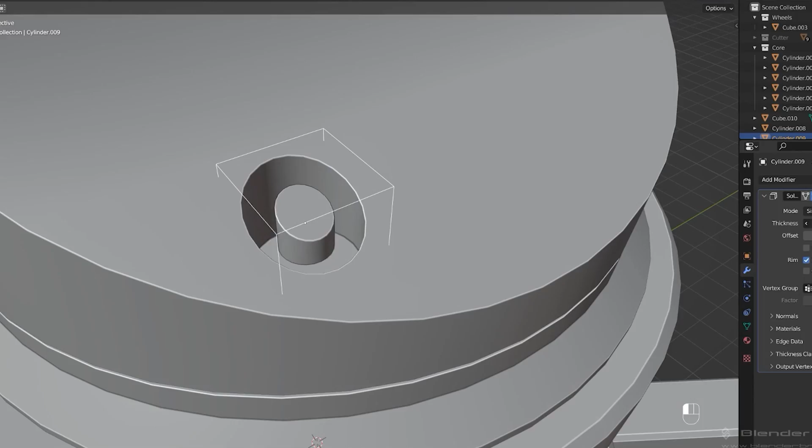Now, I'm actually really excited for this video because I'm going to show you a lot of cool tricks, including a trick that you usually can't accomplish in Blender. So stick around for that. There's going to be a lot of useful information in here.

So we're going to start with the cylinder. I'm going to make the vertex count 64, and I'm just going to right click to shade auto smooth. And by the way, I'm in an older version of Blender because honestly, I don't know why, but there's really not too much difference from 4.0 and 3.6. So if you're wondering why I'm in 3.6, I don't know. It's a good question. I think I just opened the wrong blend file, but literally all the tools are the same, so whatever.

So what we're going to do here is we're going to just go into wireframe and box select this half right here. Then we're going to go into top view and extrude this. Somewhere around here should be fine. And now we're going to have an object that kind of looks like this, which is great. Now, to be fair, I probably could have just taken a cube and beveled the edges and got the same result, but who cares? This is fine.

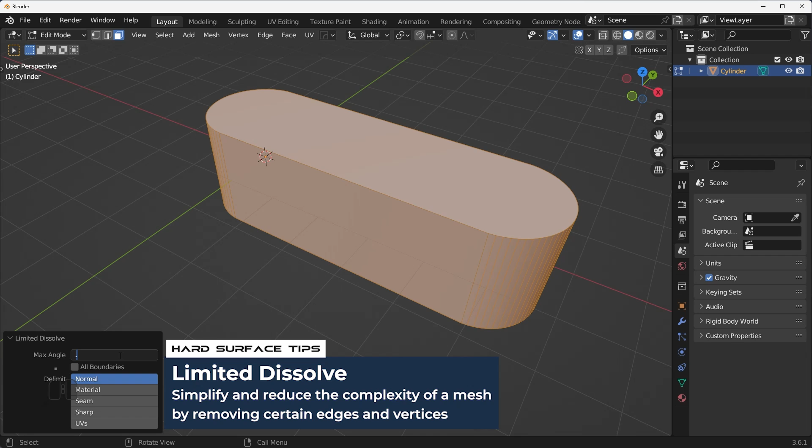So I want to get rid of all this nasty geometry on the top. Let's just select everything, press X, limited dissolve, and we're going to set this to something really low, like 0.1, so that way it's only dissolving the flat areas here. There we go. So basically I just want to have a shape like this.

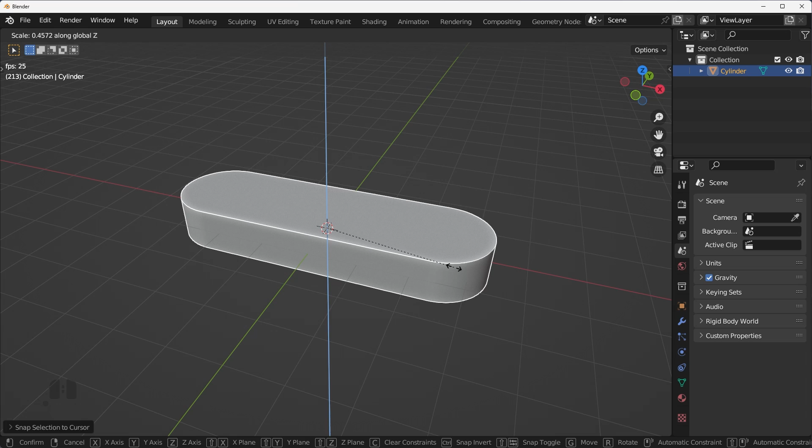Let me reset the origin to the geometry and then Shift S, selection to cursor. Again, I could have just taken a cube, scaled it, and then beveled the edges. I don't know, did it a different way for some reason. So we're going to scale this down a bit, maybe to around here should be okay. And then I'm going to press Control A to apply the scale.

And now what I want to do is add in another cylinder. So Shift A, cylinder, right click to shade that smooth. And what I want to do is I want to align it on this side here perfectly. So I could eyeball it, but why guess when you can be accurate?

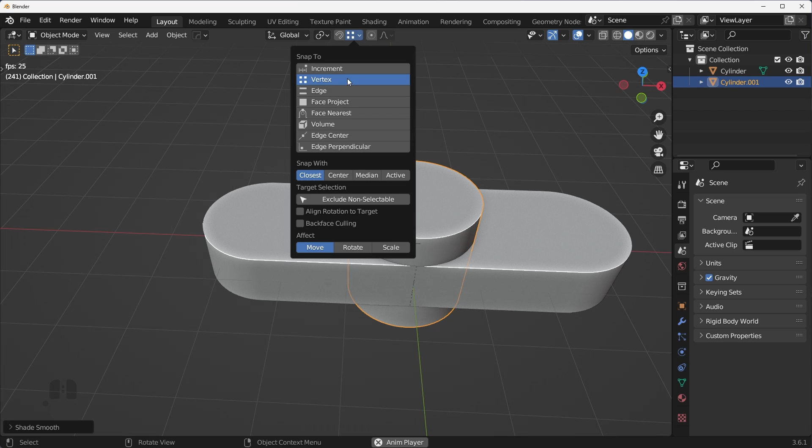So what we're going to do is go up here to vertex snap. I'm going to press G, X, and then hold Control and snap it here to one of these vertices at the end. There we go. And now we're going to have something like this, which is great. Now what I want to do is take this bottom face and snap it up here as well. So now we basically have something kind of like this.

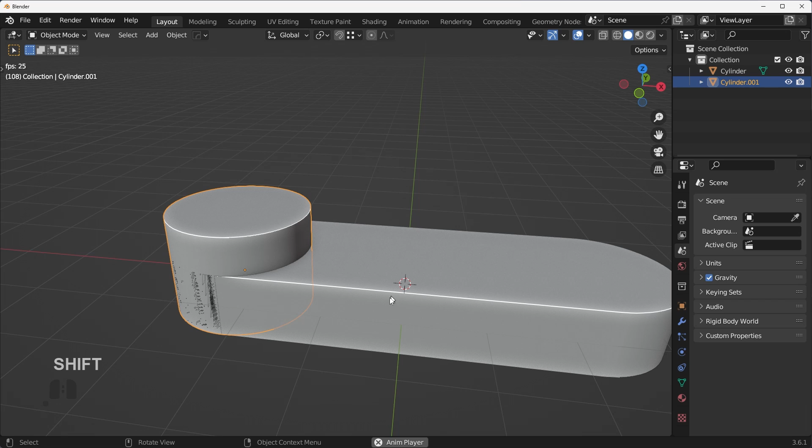Great. So now what I want to do is I want to fuse this cylinder to this object here. So the easiest way to do that is with a union boolean. So all we do is we shift click on both of these. I'm going to press Control plus on the numpad, or with hard ops, you just press Q, booleans, and then union. And it's going to break, and that's because we have overlapping geometry.

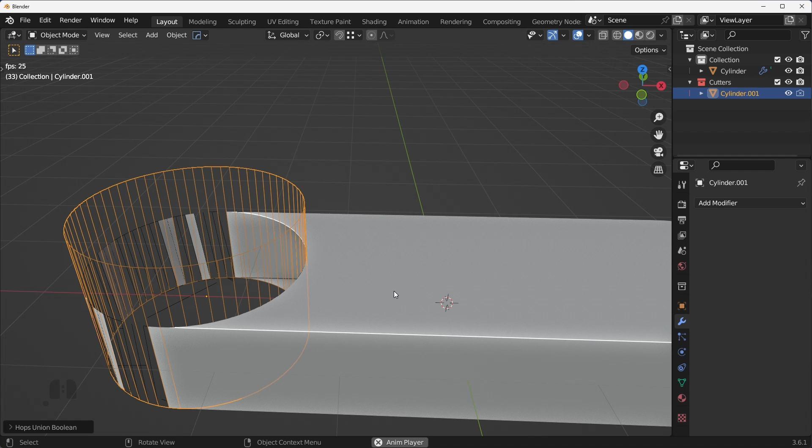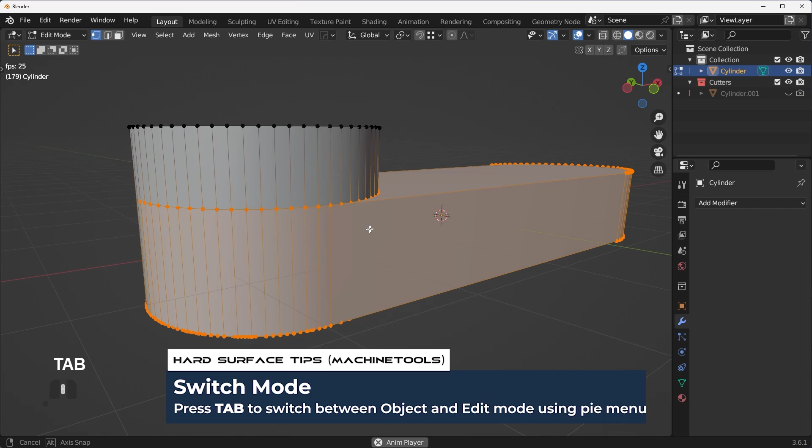Very easy fix. We go here to the boolean, change this to exact. Shout out Howard for making this all those years ago, amazing new option here. So make sure you turn on exact. Then what we're going to do is we're going to have to clean up the geometry here. So let me hide this cutter. And basically, if I go into edit mode here, you're going to see we have a little bit of a mess.

The first thing you need to do is, if you have machine tools installed, which you should, go into the machine tools settings and make sure you have all these different options turned on: clean up, smart face, smart vert, all that. Turn all of this on, and then you're going to press the 3 key. That's going to clean up any redundant geometry.

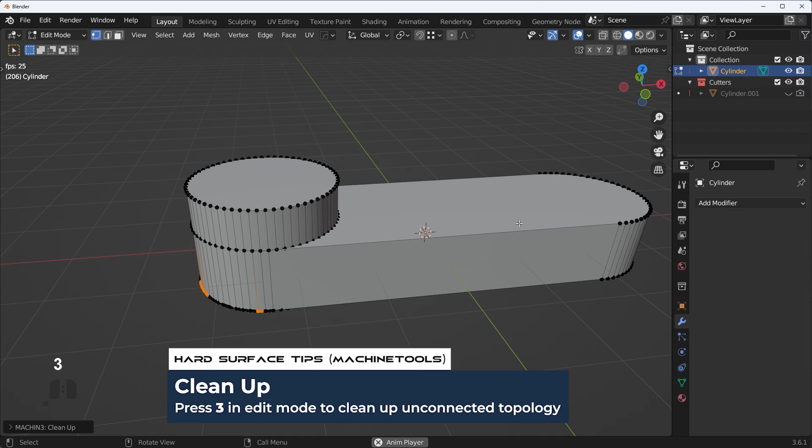Now what we need to do is clean up this random garbage down here, and we do that by pressing 3 and then limited dissolve once again. Sometimes things still break, and you'll see we have a little bit of a mess here. So what we're going to do is try to clean everything again, and then try to limited dissolve.

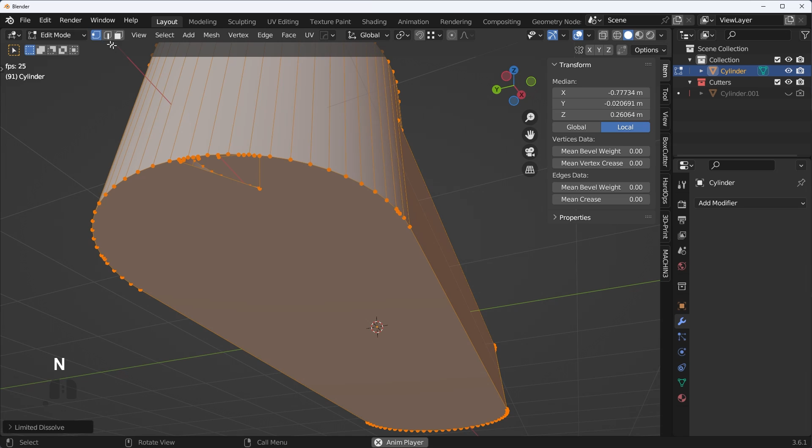If that still doesn't work, you can also use a cool little tool called the 3D print toolbox. You just turn it on—it comes with Blender. Basically you can go in here and click on check all, and you'll see we have all these non-manifold edges. I could literally press F to fill that, and then try to limited dissolve again, or even just click on make manifold, and that's going to actually fix some of the issues. You can see those redundant vertices went away.

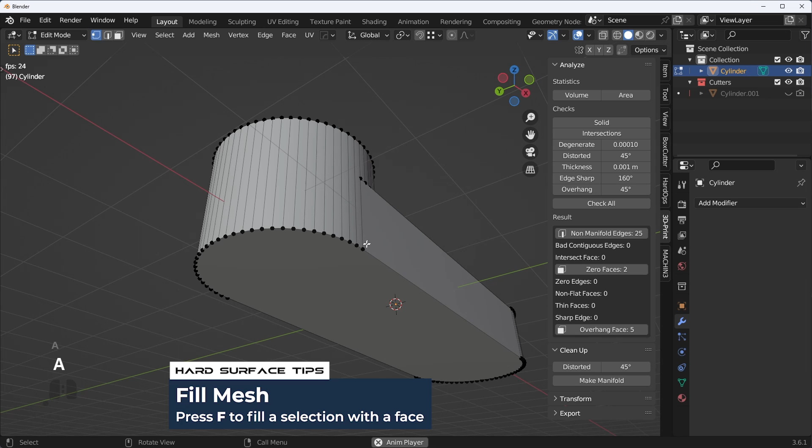If it's still a little bit messy, you can always get in here and patch this up manually. Very easy—what I'm going to do is just delete this bottom face here, and then quickly dissolve out these random vertices here. Then I can just hold Alt and fill that in. That's what happens sometimes with the exact boolean, you just get messes kind of like that. Anyways, that should be fine, it's all cleaned up.

So now we have a piece like this—this is fused together, everything's clean. Now what I want to do is actually have a bevel between these two intersecting points, right here on this edge. But in polygon-based modeling software, this is not going to work at all. This is where you would actually need CAD.

Let me show you a different solution, but if I were to go in here and try to bevel this, it's going to kind of break over here. This is the downside of polygon-based modeling software—there's not too much you can do to sort this. So to get the bevel here that we want, this is where we would actually need to use subdivision surface. This is a prime example of where booleans and bevels just aren't going to work the way we intended.

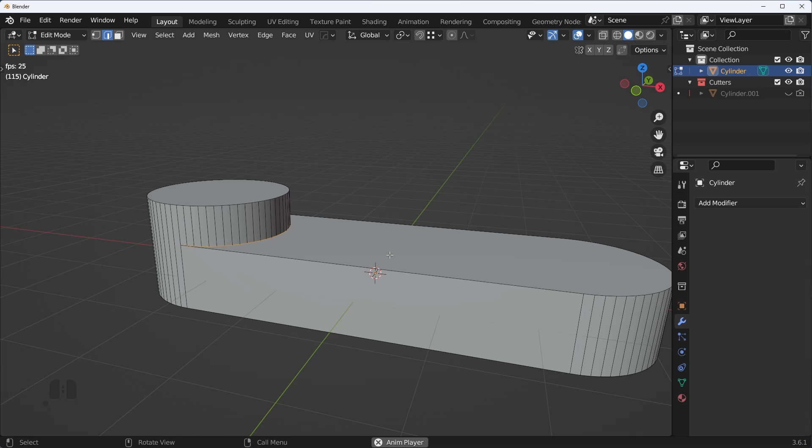So what we can actually do to solve this is use sub D, and I'm going to show you some really cool tricks here to achieve a clean bevel in this area. Now the first thing I want to mention is if we're running sub D, it's going to increase the resolution, meaning we should be starting with a lower poly version. This one's a little bit higher poly—remember we had a 64 vertex cylinder, but it's no problem at all. What I'm going to do is either undo everything and add in a lower resolution cylinder, or check this out.

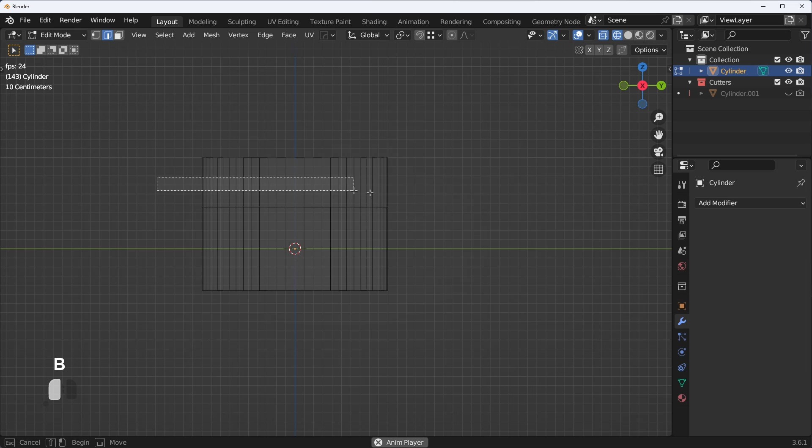I can go into wireframe, go into edge mode, box select this, and then go to select, checker deselect, and then Control X to make that lower resolution. I'm going to do that here as well—I'll use the circle tool to select them, checker deselect, and make sure you're not holding the edge, but the one before it. Otherwise it's going to hurt the bevel. This last edge is what's holding the curvature on the bevel.

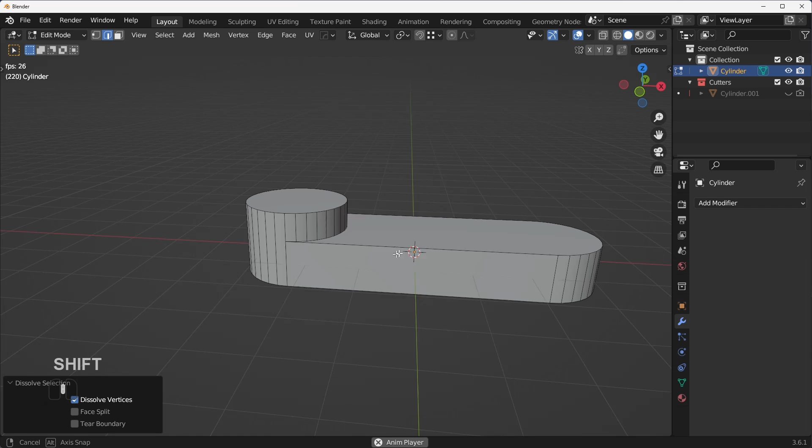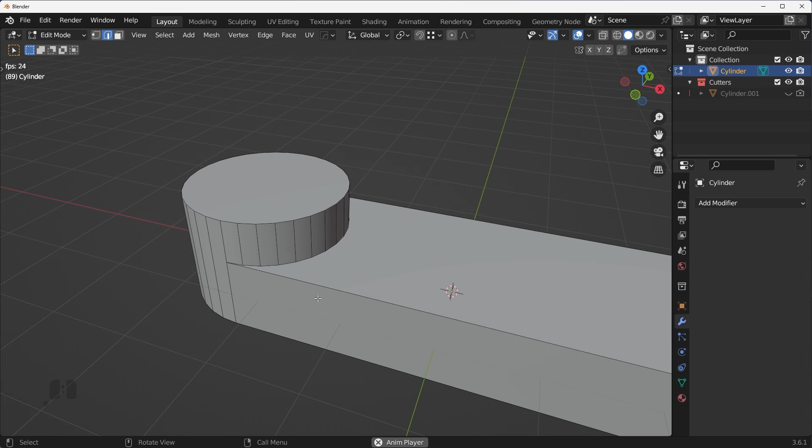So we're just going to turn this to offset 1 and then Control X to dissolve that. Now we have a much lower resolution object here, which is great. Now if I try to just run a sub D, it's going to turn into some sort of pumpkin or something crazy, and that's not what we want. So what we're going to do is have creases on the edges we want to hold, and a regular sub D on the areas we want rounded. It's probably confusing, so real quick I'm going to press Control tilde, go to the sharpening menu here in HardOps, and make sure you have this crease option turned on.

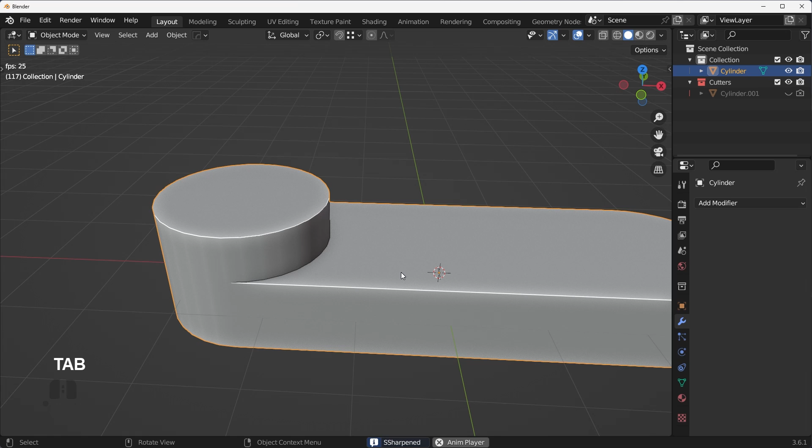If I press the Q key and click on sharpen, all the hard edges here are going to be marked with a crease. So now if I run a sub D, it's actually going to hold everything together except for this area here.

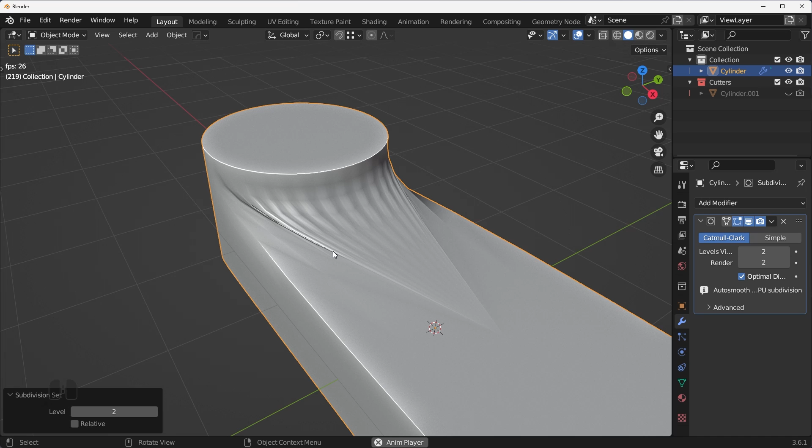What I want to do is remove the crease on this portion. So we select it and press Q to unmark it. Now if I run a sub D, we're getting something close to what we want, but it still looks strange because we have one massive n-gon right here. Sub D is not going to look very good on an n-gon, you can't subdivide n-gons very well.

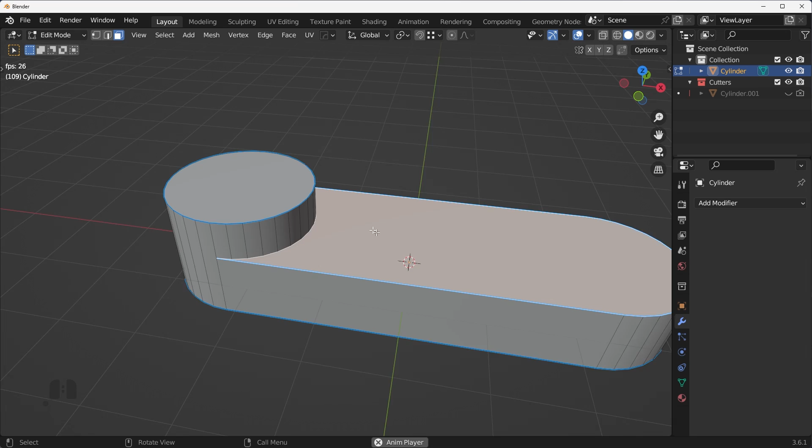So basically what we need to do is isolate the area where we want the bevel and retopologize that specific area only. It's probably confusing, but let me show you. If I were lazy, I'd just use something like Quad Remesher and call it a day, but I'm going to show you a really cool solution.

What we're going to do is use Box Cutter. We're going to cut somewhere around here and then press the K key to run a knife cut. Now we're going to have something like this, just to cut straight through the object. The first thing I want to do is select this edge, right click, subdivide, and then connect these two vertices up with the J key.

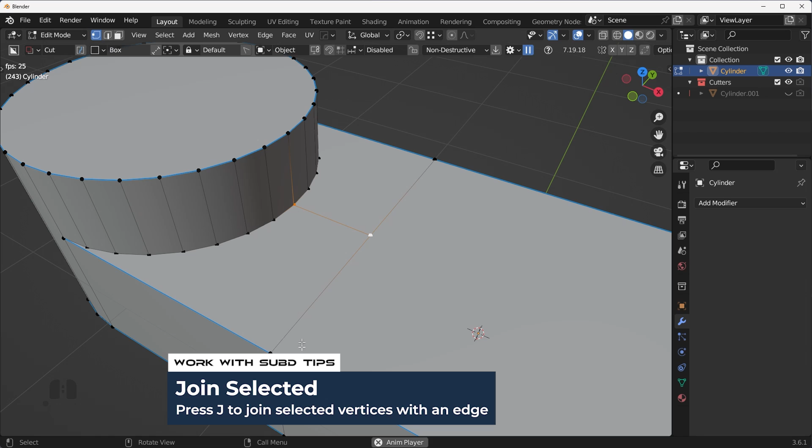What we're going to do here is retopologize this area only. Next I'm going to press J to join these two. Then I just need two additional vertices, so I'll press Control R, scroll up, and click. Then I'm just going to join these together with the J key, just like that.

We're already getting a step closer. Now what I want to do is the same thing over here. We have 1, 2, 3, 4 vertices, so 1, 2, 3, 4 edges. Again that's Control R, we're going to load those in and join them up. Don't worry about how it looks right now, we'll fix it in a sec. We just want to get this area retopologized first.

Now I'm going to keep this lined up a little bit better. I'm going to select this edge and press G twice, and we're just going to slide that over and keep it consistent more or less. Maybe around here—doesn't have to be perfect, just try to be good enough.

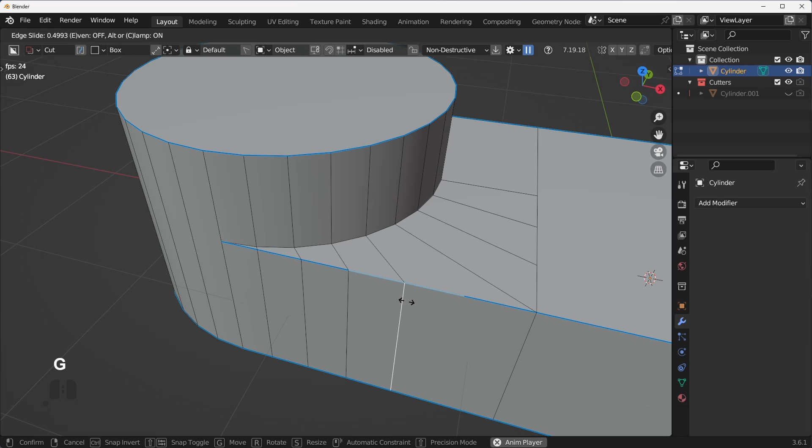What I'm going to do is use Symmetrize with Mesh Machine to symmetrize to the other side. You could also just use a hard ops mirror—press Alt X and we can apply that mirror. Now we have it on this side as well, which is great.

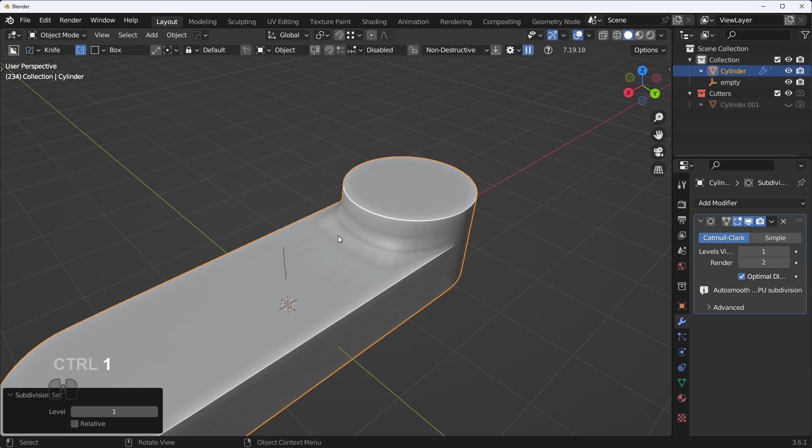So now what we can do is run a sub D, and you're going to see this is a lot better. You can see the higher I go on the sub D, the smoother it gets, the more natural of a bevel we have.

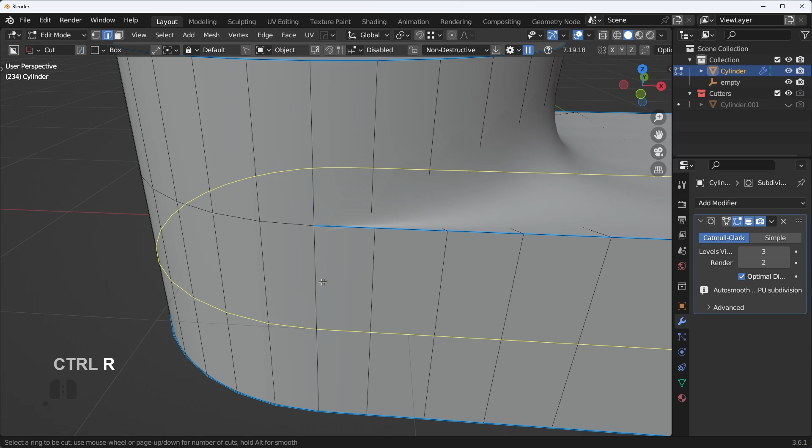Now we have a little bit of pinching over here. I'm not too concerned about it, but we can fix it easily by pressing Control R and joining this area together here. There we go, so now most of that pinching will have gone away. You can always add in another one if you want to even it out a bit more. You get the idea—okay, so now we have that bevel that we were going for.

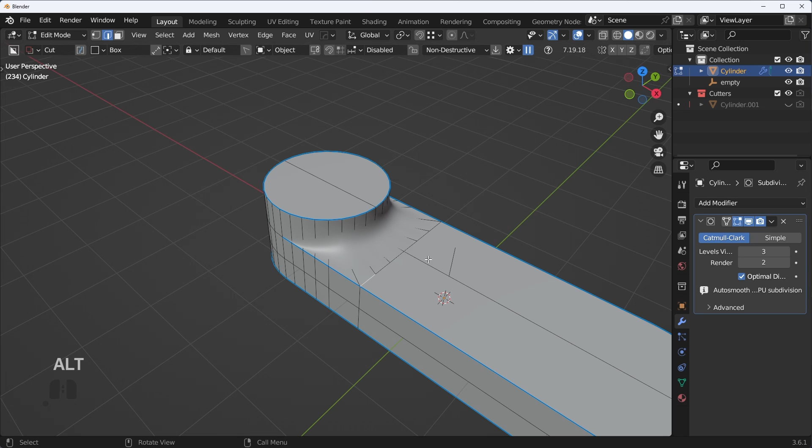Some people would recommend merging these really close areas together for better effect, but this is about as good as we're going to get here. So now, as you can see, I've basically isolated the area I retopologized just to get that clean bevel formation. If I wanted to, I could always go in here and slide this around—if I want to tighten up that bevel, I can do that.

Just depends on what type of effect you want on here. I think something like this will look pretty good. Again, you can play with that and see what you like, what you don't like. You get the idea.

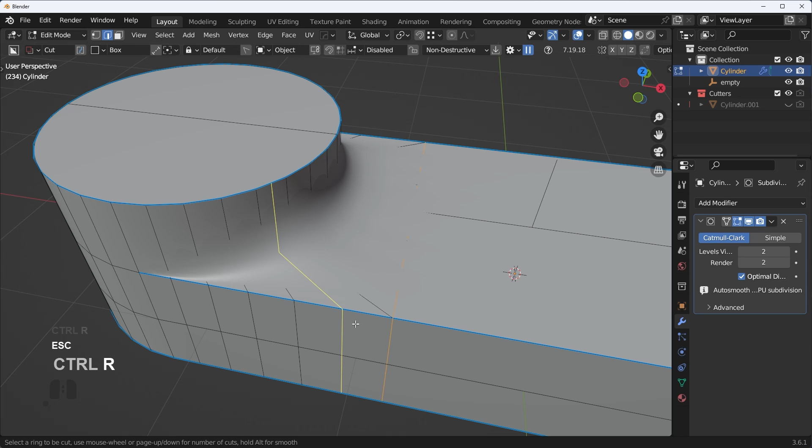Anyways, it looks pretty good to me. Now what I would recommend doing is pressing Alt V and then go into wireframe mode. Let's turn off the optimal display in the sub D.

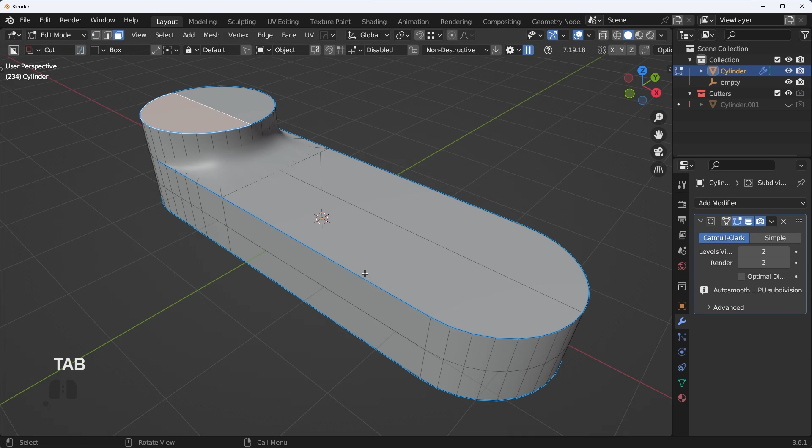We can just kind of see, the rest of this area is a mess because we're subdividing n-gons in the other areas of this mesh. As you can see here, we have a big n-gon over here. You get the idea. Thing is, I don't care because I'm just going to remove all that junk anyways.

So I think we can use a level 2 subdivision for this one. You don't want to go too low or it's going to look blocky. Too high might be a little bit too high resolution, which is fine. How about we go with a 2? I think 2 is fine.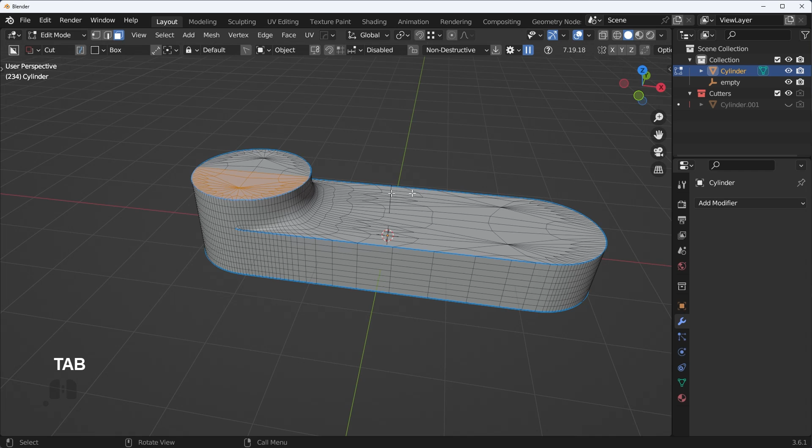What we're going to do is apply that sub D. And we're just going to clean this up by, again, selecting everything, X, and then limited dissolve. There we go. So now it's only going to dissolve the junk on the flat faces and the areas that kind of have curvature here. In this particular area, you can see it's kind of holding all of that.

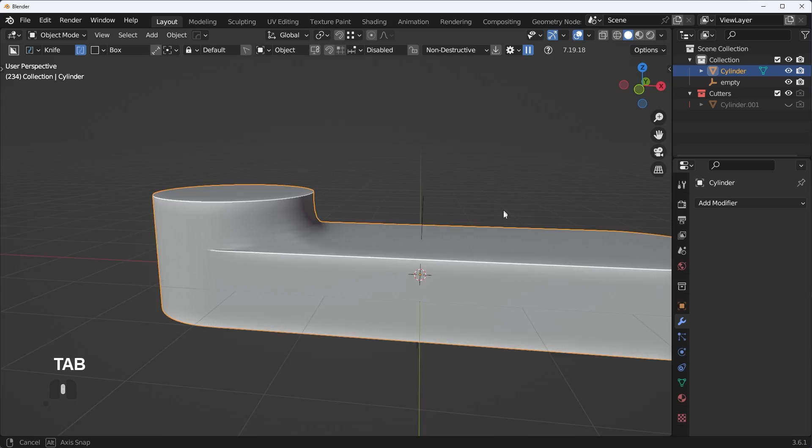You could increase this angle a bit if you wanted to push it a bit more forward. And honestly, that should be fine. I'm not too worried about it. But don't start dissolving this stuff, because if I go into side view, this is actually holding the curvature there, so you don't want to go too far. Anyways, now we have a nice bevel without having to use a CAD software, as you can see.

And I actually ended up limiting dissolve a little bit too much over here. So again, that's why I'd really keep this as low as possible, if you can get away with it. Something around there would be fine. Let's just do 0.1. Can even slowly increase this. Maybe like right around here could be fine.

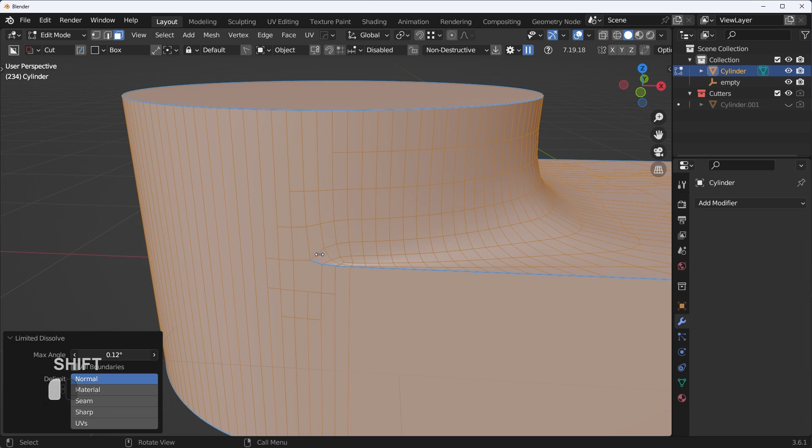Awesome. And then if you just have extra garbage here, feel free to just dissolve that out. We'll just grab these, and there we go. And you might have some extra stuff over here as well. This can be dissolved out as well. It doesn't matter too much. But what I can tell you for sure is you don't want to go any further than this. So let's just leave it there. And there we go. Now we have a nice bevel.

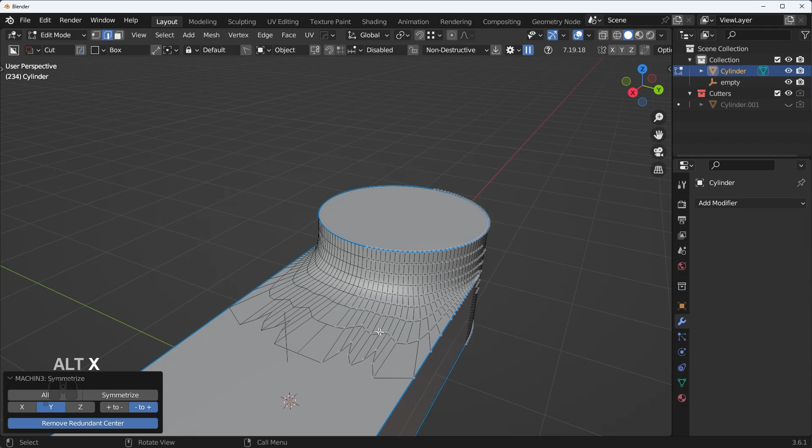Cool. So I'm not really trying to get super clean topology in this situation. All I'm trying to do is just get a nice bevel here.

Alright, now what I'd like to do is let's go in here. Actually, let's press Alt X and then mirror this thing on the Y axis. Yeah, it looks pretty cool. And then I'm just going to apply that mirror modifier, just like that.

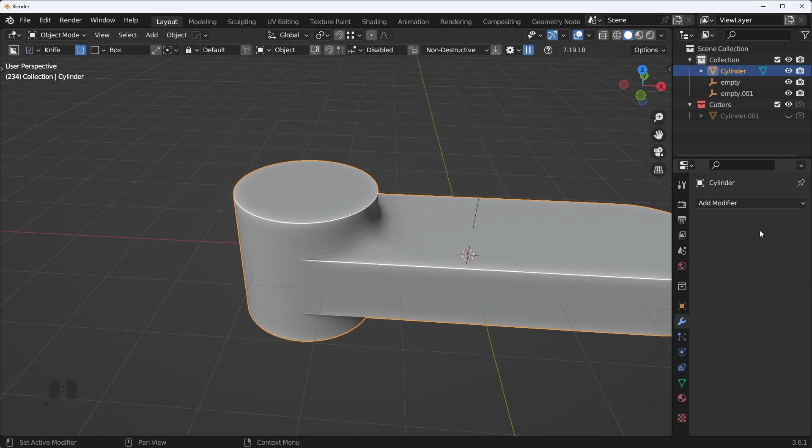And what I'd like to do at this point is let's take this face right here, Q, booleans, and then selection to boolean. We're going to move this in to about here. And then we're just going to cut all the way through, just like that.

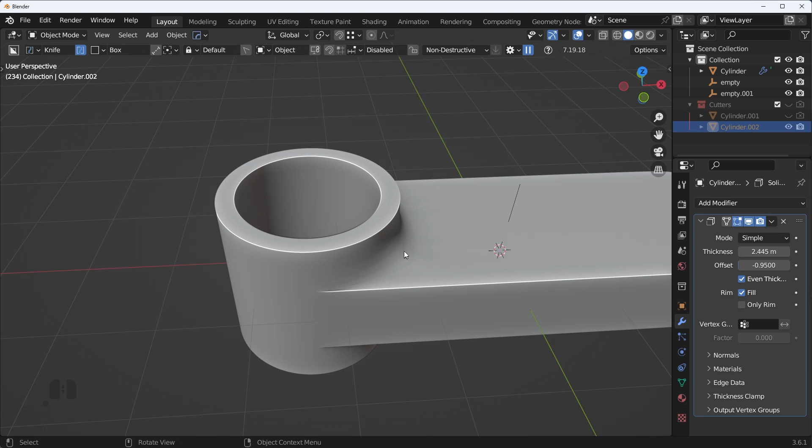Awesome. And then sometimes the cavity feature turns off, I think that's a bug. We'll just turn that back on. There we go. And then what I'd like to do is, how about we just apply that boolean and then Control R to the inside, Control B. Then let's press E to extrude, right click to cancel, and then Alt S to scale along the normals, and then scale that a bit on the Z, and just make some sort of cool detail here on the inside.

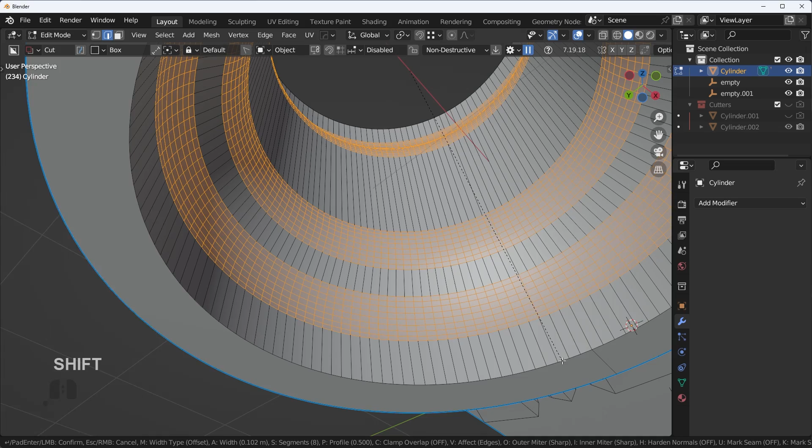So just bevel this area. There we go, that looks pretty neat. And I want to make this area here a little bit higher, so let me just take these faces and move that up a little bit.

Just add a mirror. It's a little bit too much, maybe to about here. And then we can just mirror that to the bottom. There we go. So now I want to focus on this area a little bit over here.

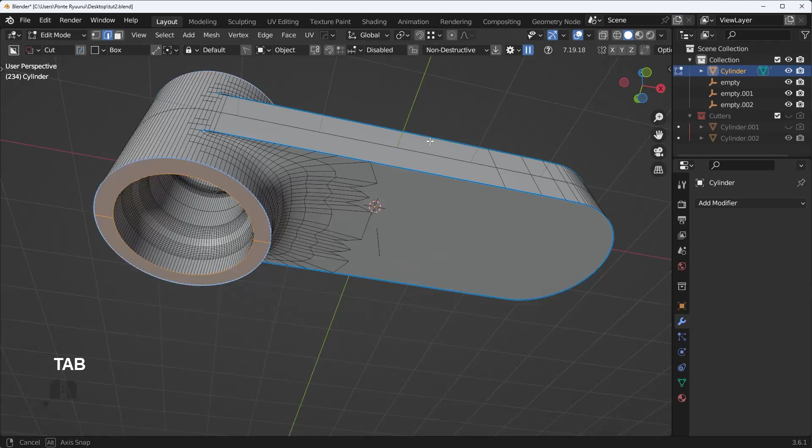So what I think I'm going to do is, how do I want to do this? Let's go to the cutters menu and see if we have any cutters we can use. I don't think we did. Yeah, we don't. Let's turn that off. What I'm going to do instead is I'm going to steal this area here.

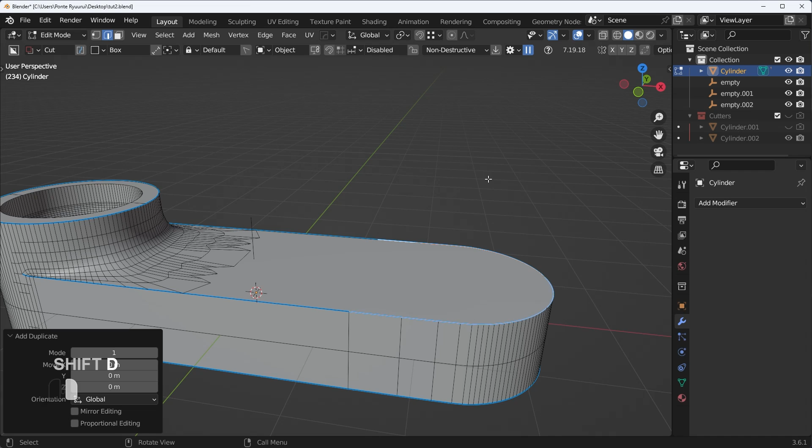So Control click, Shift D, right click, and then P to separate that by selection. I just want to take this area here. I'm going to move that up a little bit. And what I'm going to actually do is mirror this over itself.

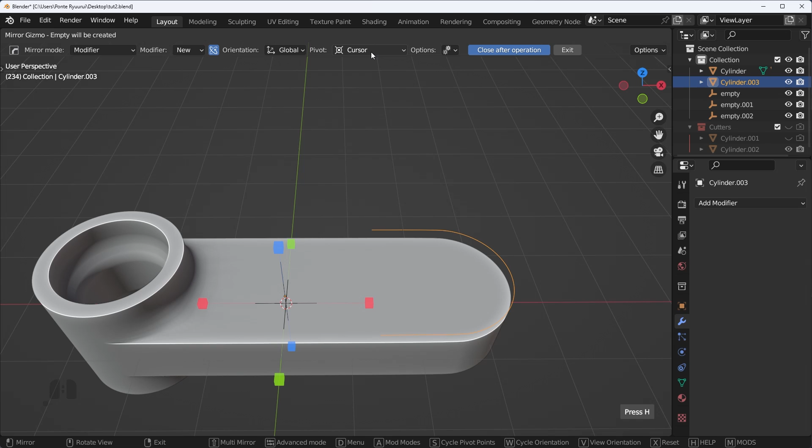Now, if I press Alt X, the mirror point is going to be over here. So let me press Alt X, make sure this advanced feature is turned off. And actually, no, I want to turn this on, but I want to mirror over the cursor, but the cursor is here right now.

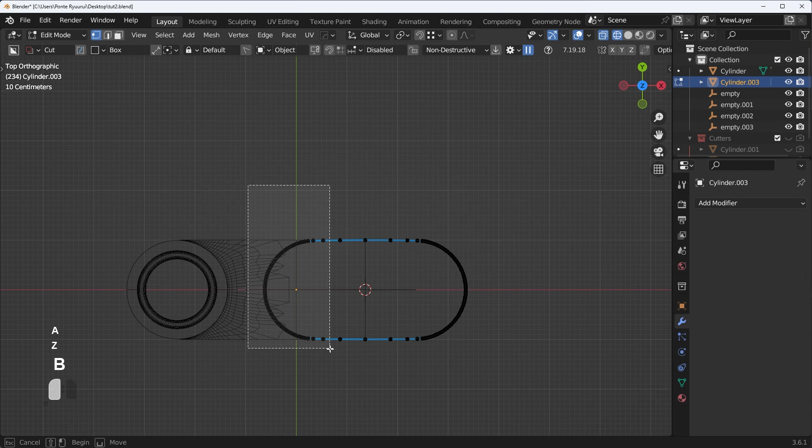So what I'm going to do is take these two vertices, Shift S, and then cursor to selected. Now it'll be right there. So now if I press Alt X and try to mirror it, I kind of have this cool looking effect, which is great. I can just apply that mirror, and then get in here and move this to my liking, maybe to about here.

Let's just get in here and get rid of this junk, which we don't need. And then I'm going to press A and then F to fill it, and then I to inset, maybe to about here. And then if I invert the selection with Control I, I can delete out all these vertices here, which is great. Actually, no, we'll just leave those alone. I think that's holding the curvature.

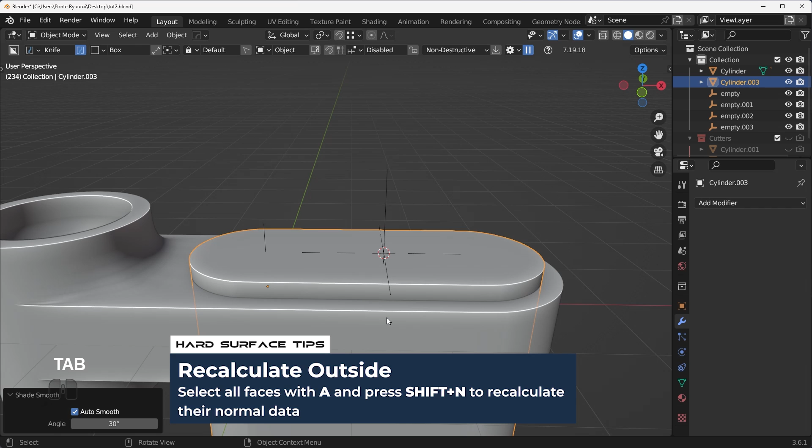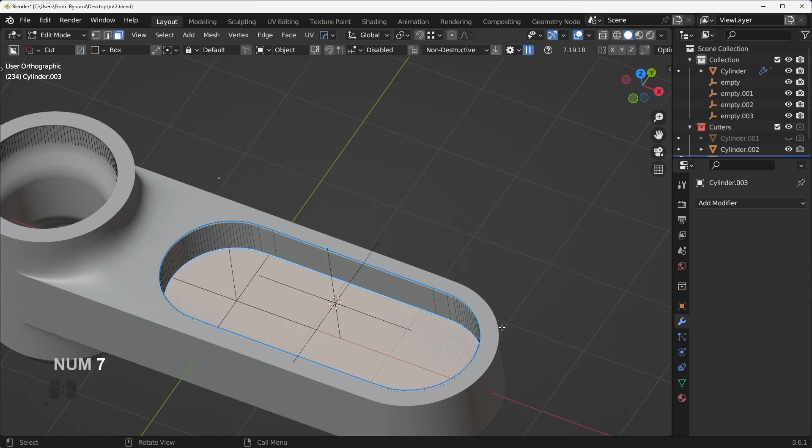So right around here, can run a difference boolean. Right around here should be fine. And then I'm going to take this top face, move this down to about there. And then I'm going to take this bottom face and just scale that in a little bit, until it's roughly even on all sides, kind of like that.

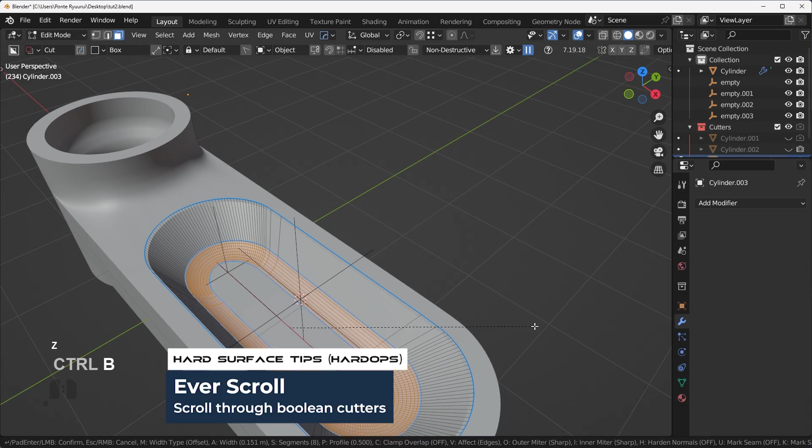And then I can just shift click on sharpen to adjust that auto smooth. There we go. Now I would like to have a nice bevel here in the bottom. So let me press Q, scroll, get in here, and just kind of bevel that area a little bit. That looks pretty neat, and then I'll just apply that. Actually, yeah, let's apply it. There we go. And then just Control Shift click on sharpen to recalculate everything. That looks pretty good.

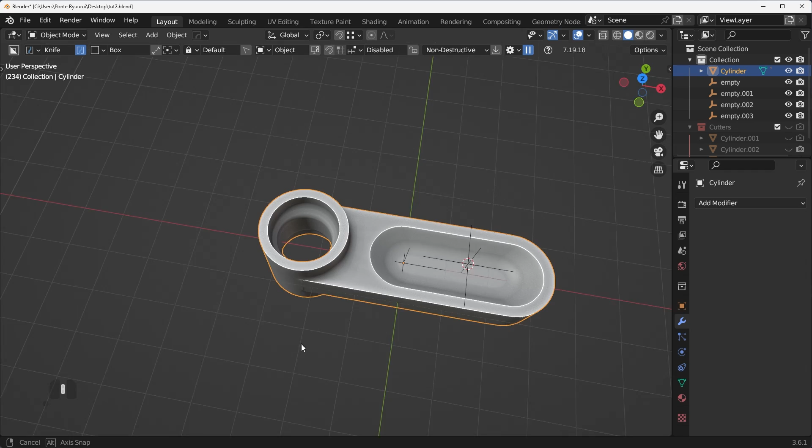Definitely looks nice. So now we kind of have a symmetry on the Z, but this area is not on the bottom, so we're kind of breaking the symmetry in a way. It looks cool. And then what I want to do is maybe just add in a cube and make another cut down here, just do it the lazy way.

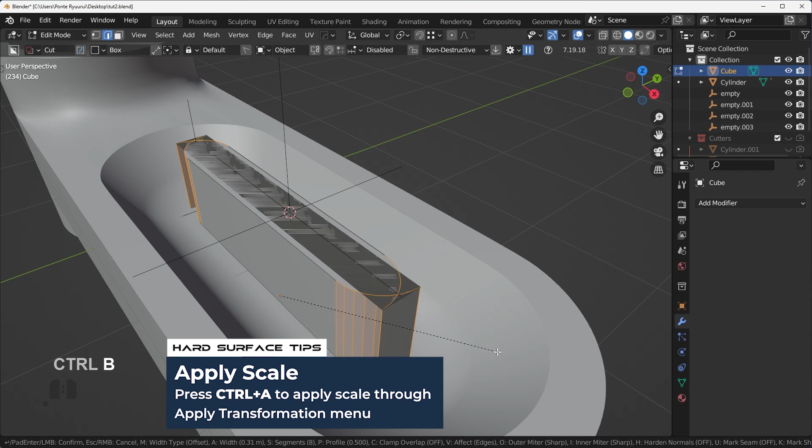And then just scale this all the way through, apply the scale, and then I can get in here and bevel this area, clean that up. And let's shade auto smooth and then run a difference boolean down here. There we go, looks pretty good.

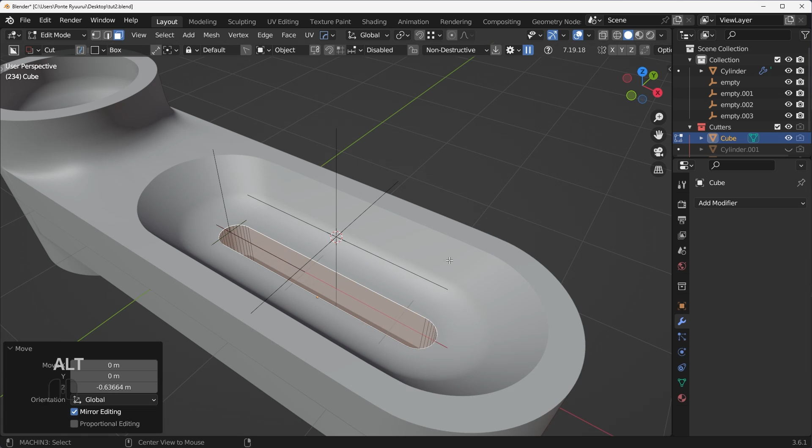Then I'll show you a cool trick. I can actually take this cutter and move this face down right to the top there. And if I press Alt N to flip and then bevel, it'll bevel in the opposite direction, which is really cool. We can just adjust the sharpen there.

I can even hide these little empties, don't know why they're here. I think it was from the mirror. Can't select it, but you get the idea. We can actually go in here and turn off the extras so we don't see them. Awesome, now we have this cool looking shape.

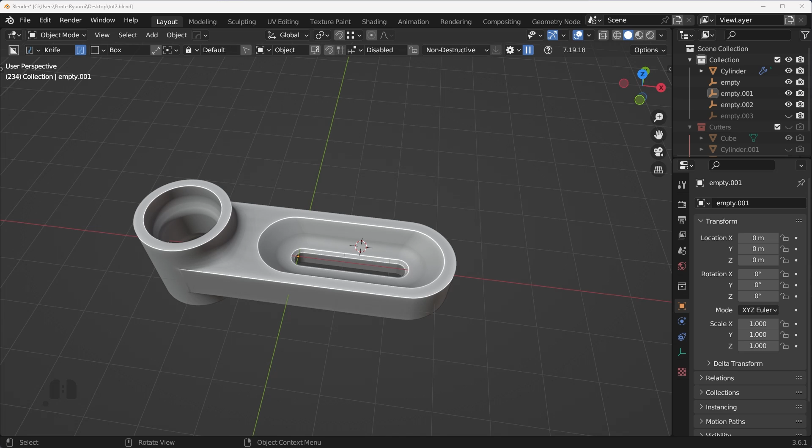So let's apply the Boolean, and I'm going to go into top view and maybe just make this a little bit longer, I think it'll look cooler. Yeah, it looks pretty neat.

And then what I want to do is take this upper portion and add a chamfer to this. Now, if I press Control B and add a chamfer, it's going to stop us. That's because the clamp is about to overlap right here. So what we can do is press C to ignore that.

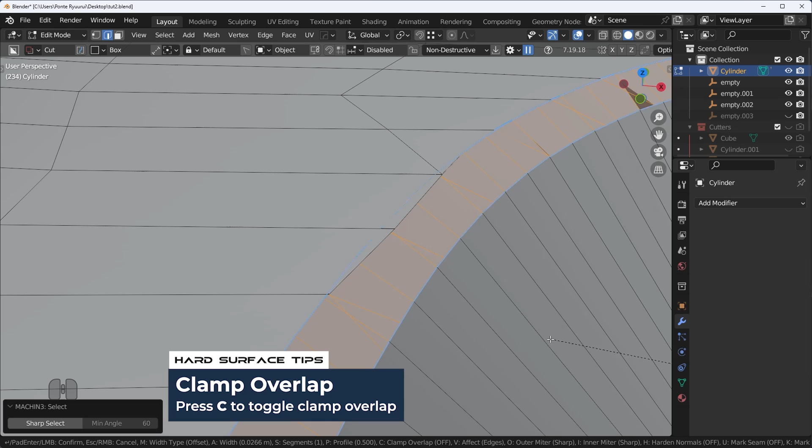The issue with this is if I add the bevel or the chamfer this way, I'm going to have this mess. So I'm going to have to really get in here and just slide these areas away, and I just don't know what to select.

Much easier way to do this is to actually press Q, Control click on mark. That'll add in a non-destructive bevel, one that I can actually turn off and on. But the upside of this is I don't have access to that bevel geometry, it's just like it was before, right?

So I can actually select the areas and slide this outside of the bevel, outside of the way. So that surrounding geometry causing these weird artifacts, all I have to do is literally just get in here and clean it up. I can just kind of merge these together, don't have to get too fancy with it. I just want to get rid of those artifacts.

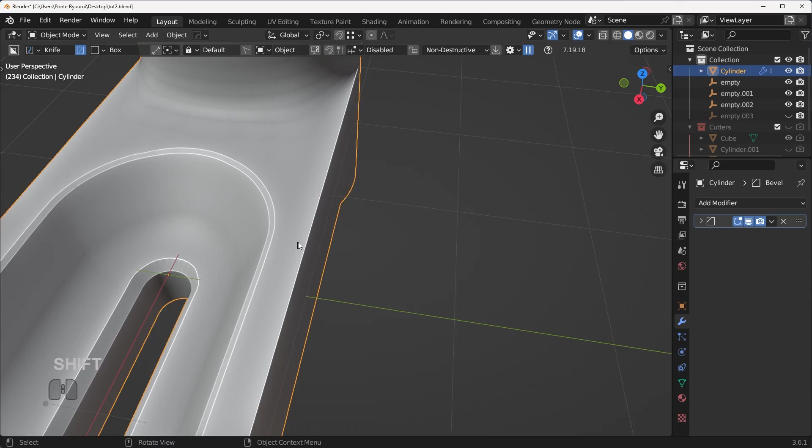There we go. You can also just adjust that bevel a little bit. And if you're still getting artifacts, you can always just dissolve out some of these areas. You'll be fine. Cool. And then let's just mirror to the other side.

That looks great. And then at this point, I think it's safe to just apply that bevel. There we go. And then I can also apply the mirror. And now we have this pretty clean looking piece.

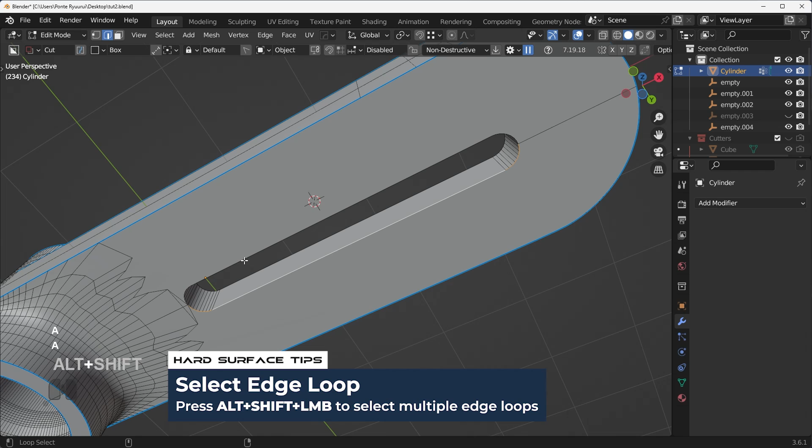I'm not going to really adjust the bottom too much, but maybe here on the bottom, I could do the same thing. I could Alt-Shift click, just do a small chamfer down here, and just kind of do something like that.

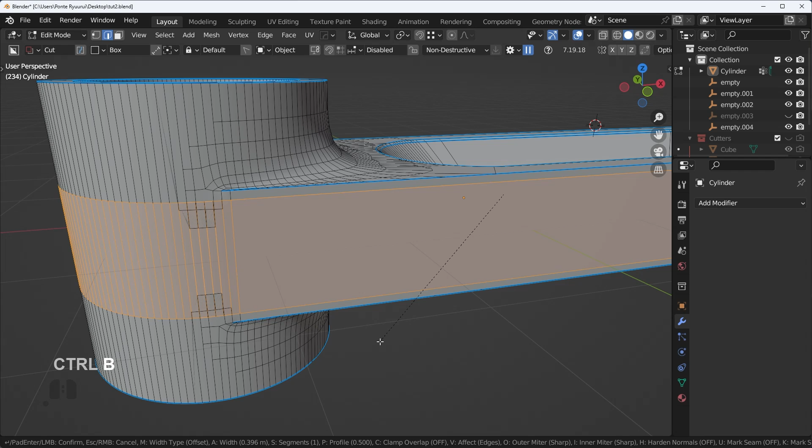Looks pretty good. So I think that does it for the modeling portion, and you could stop here if you wanted to. We do have a little bit of strange shading over here, not a problem. I can always get in and just kind of bevel this area to isolate it, just dissolve out this junk. There we go, looks good.

Okay, now what I want to do is I want to go into rendering mode. How about we render this thing? Why not? I don't know what I just did here. Oh, it's because I ran a symmetry.

Whoops. Yeah, you got to be careful. If I symmetrize to the bottom, we're going to have the same thing on the bottom and top, which maybe you want that. I'm just going to leave it alone and just dissolve this out manually. There we go.

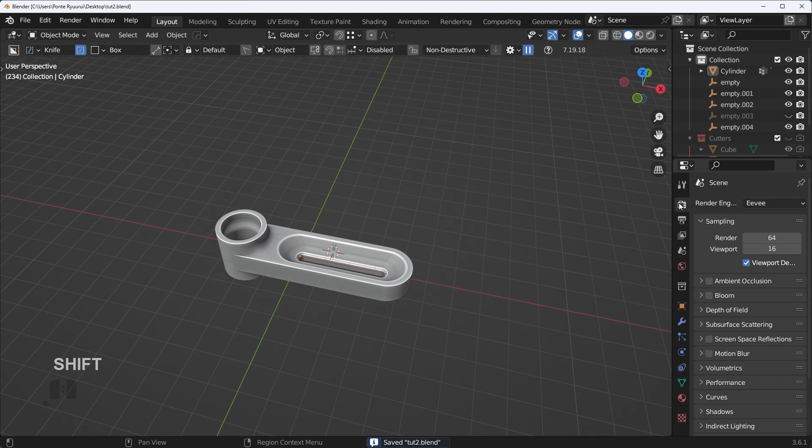Okay, so let's go in here. Let's go into cycles and make sure we're rendering on our GPU. And I'm going to be using the Abandoned Slipway HDRI from polyhaven.com. It is a free download, so get it. So I'll just go here to environment texture and then just open up that HDRI.

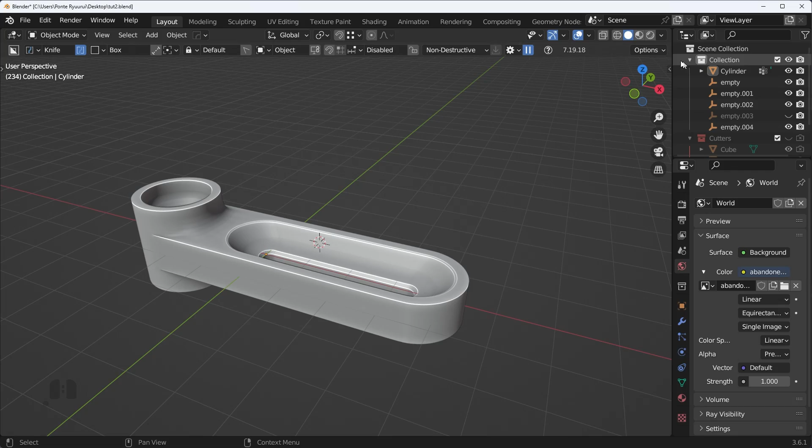So I have a ton. I'm just going to load in this one. There we go. And then if we go into rendering mode, we're going to see we have very flat lighting, which is great. Now I'm just going to turn that off.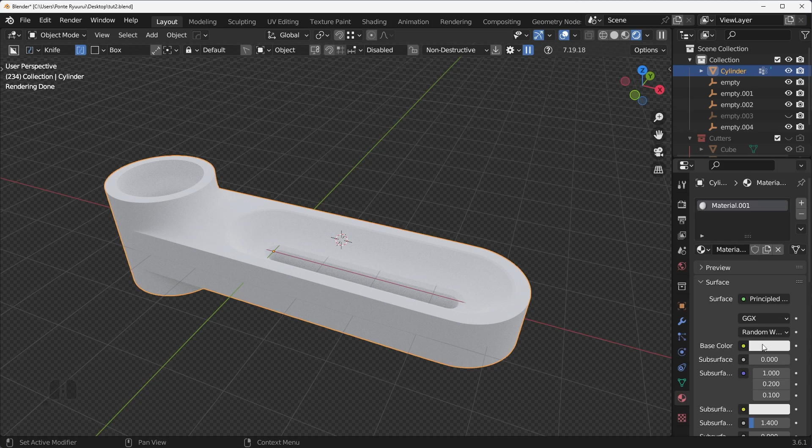We're going to go here to the rendering panel, go to film, turn on transparent, so I don't have to see it. And at this point, we're just going to add in some textures to this, make it look a little bit more interesting. So you could just use some basic Blender materials here. You could just add in a material, add some metallic values, and you'll have something decent. Issue is this looks very plain, boring, not realistic.

So instead what I'm going to use is MaterialWorks, which is our custom hard surface texturing add-on, and we actually have a brand new feature in this. I'm going to show you. There we go. So basically we have 50 different hard surface materials to choose from here.

I'm going to go with the aluminum because it just makes sense, right? And make sure you're not on UV mode. It's going to look weird. Go to procedural mode. That'll also get rid of the seams. So you can kind of see we have a seam there, and we can actually get rid of it by blending it together. So there we go.

And now what I want to do is also add in a bevel. We don't have to use a bevel modifier. We can just turn on this bevel feature here. Now we have a nice bevel.

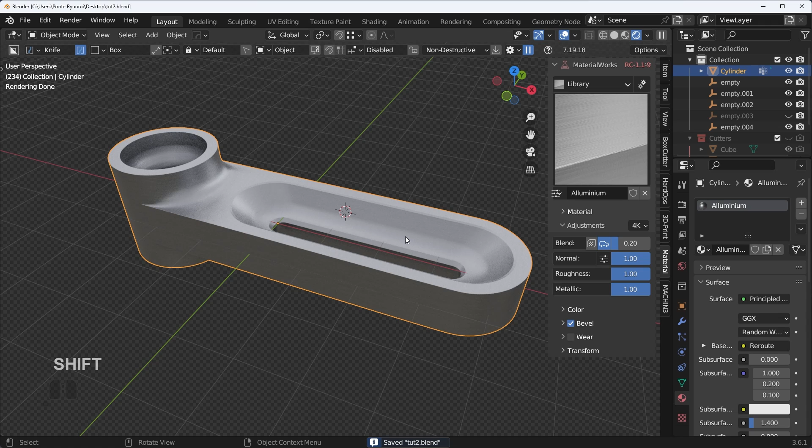And then what I want to do is add in a little bit of wear and tear. This is actually a new feature. It is almost complete, should be out very soon. So I'm going to go to this button here, and that's going to turn on wear and tear. So I'm just going to kind of play with this a little bit.

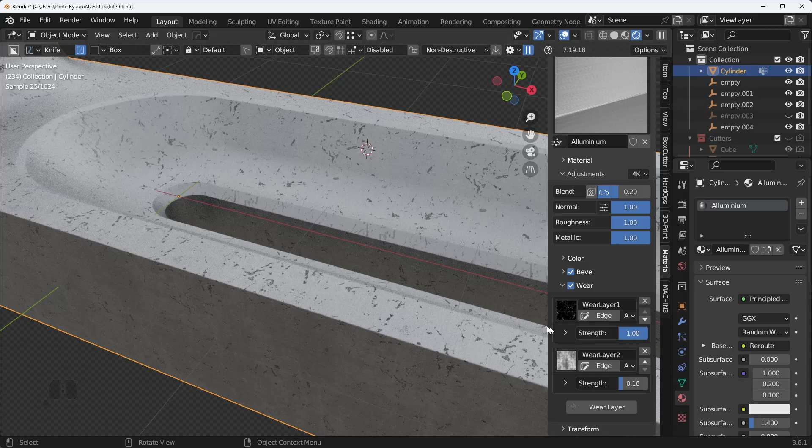So how about we change this to dust? I don't want to use the edge. Just kind of slightly drop the strength. So now we have a little bit of like a layer of dust on there, which is great. I'm going to turn this one to 0. I don't need that. So now we have some dust on the aluminum, as you can see. Just a little bit, nothing crazy.

Now my all-time favorite feature here, let me show you, is this edge wear option. So I'm actually going to do one more layer here. We're going to go to edge wear, and I'm going to turn on the edge feature. What this will do is add wear and tear to the edges only. Now check this out. I can actually go in here, increase the width, and now we have this really nice looking, kind of wear and tear right from the edges of the object here.

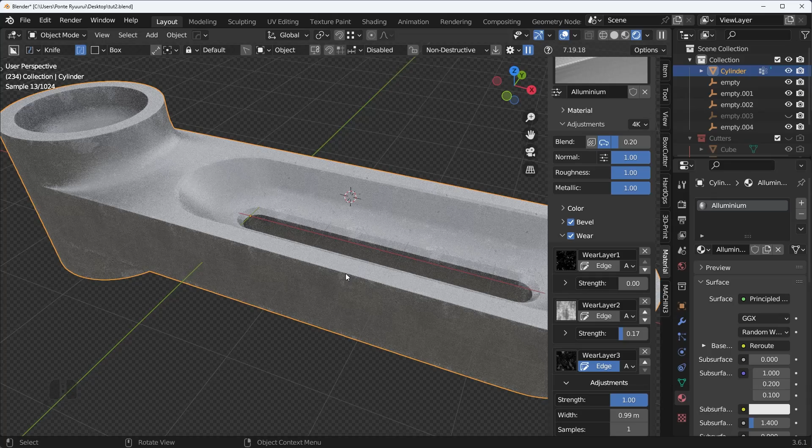I think this one here is going to be fine. We're just going to put that all the way up to 1, that should be good. Now you can see we have this cool looking wear and tear, maybe a little bit less. I can even drop the strength a bit if that's too heavy, so now you just have a very subtle layer of wear and tear. We can drop that down, which looks great.

We'll just add in another layer here. Basically you can add as many as you want. A few bugs we're still patching out, just a few issues, but this should be sorted very soon. We have stuff like rust, which is interesting. If that's too many, you can always drop the scale and get in here, make very subtle stains and stuff just to enhance the overall look.

You can even add in some additional edge wear. We just go in here and play with it some more. And there we go, just like that, we have a little bit more visual interest, making it look more natural, more realistic looking.

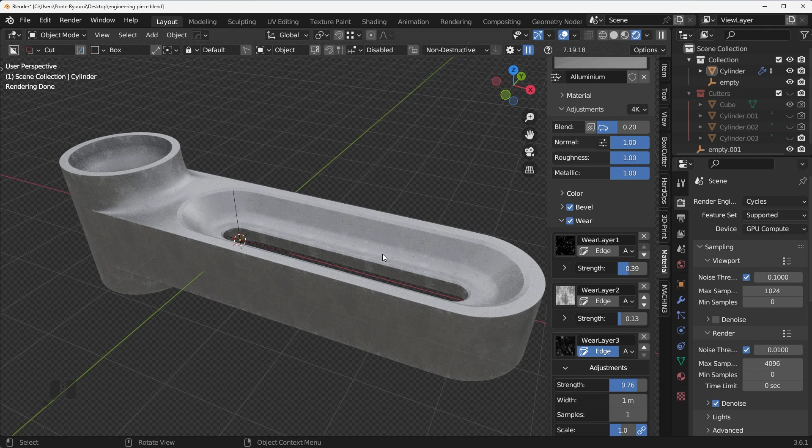And this is way better than just a default Blender material, it's night and day difference. So if I were to add in again just a boring Blender material, move this to the top, or remove this one rather, it's not the same. It's just boring, nothing's going on with it.

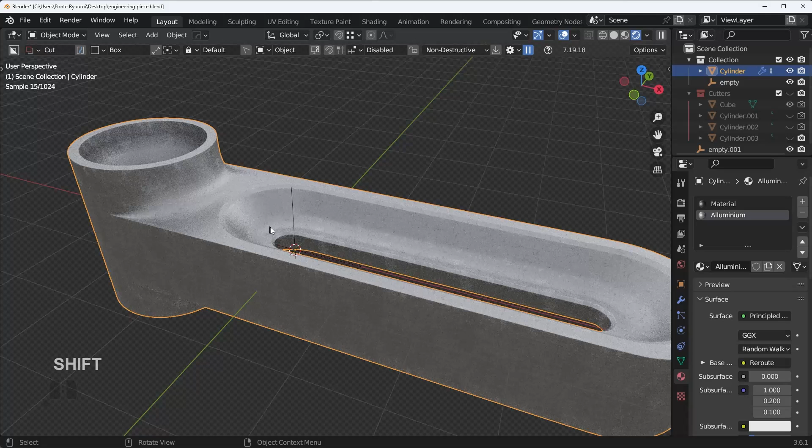So this is a nice way to make that slight improvement in your portfolio that just looks better than everyone else's, because let's be real, everyone is producing the same junk. They're putting in zero effort, they're not investing in themselves to make their work look better. It's just very small stuff like this on your work that can add that extra layer of realism, which is really what you want. So let's go ahead and render this thing.

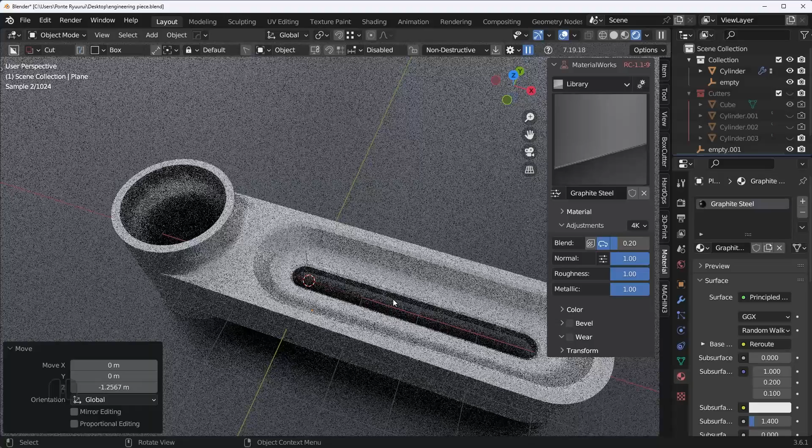I'm going to press Shift A, go to plane, just scale that up, and I could even use a different material here from MaterialWorks for the background, there's basic metal. I don't think camo would really look good here, but some sort of basic simple background is all I really need for this thing. You can really see how this changes the lighting, makes it look better.

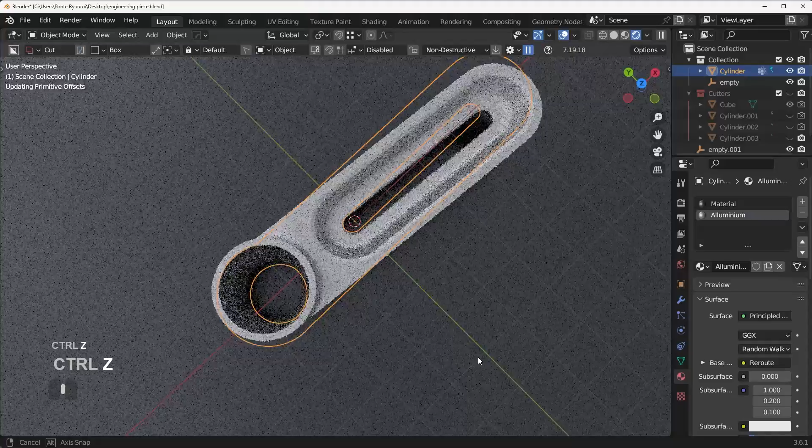Not bad, I can even rotate this. Let's actually do Control A, Visual Geometry to Mesh, so that it looks decent, and I can just move that to the ground. I'm just trying to find a cool angle to render this thing, just a very basic angle, nothing crazy.

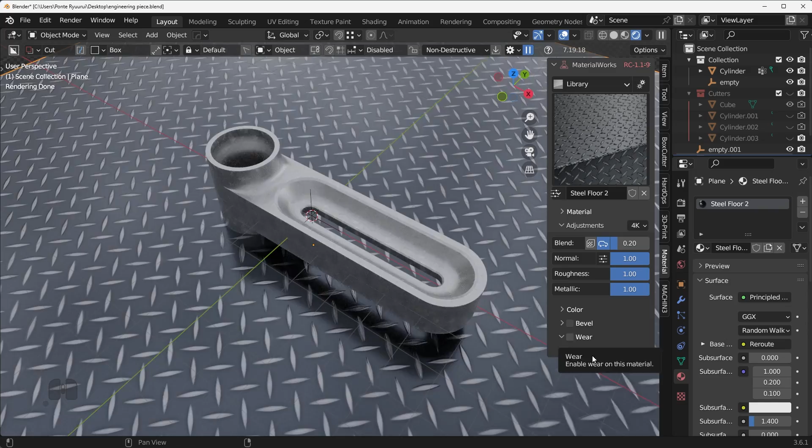Could even play with some different materials here on the ground, there's a different floor here we could try. Actually, I could even use the wear and tear on this one too. So what I could do, just go to wear, add in an extra layer, maybe use a rust here. Let's try the rust C maybe. Actually, I don't think this is going to look very good, so I'm just going to use a more simple material instead. I don't really want to distract from the important elements here, just a very basic material should probably be enough in this case.

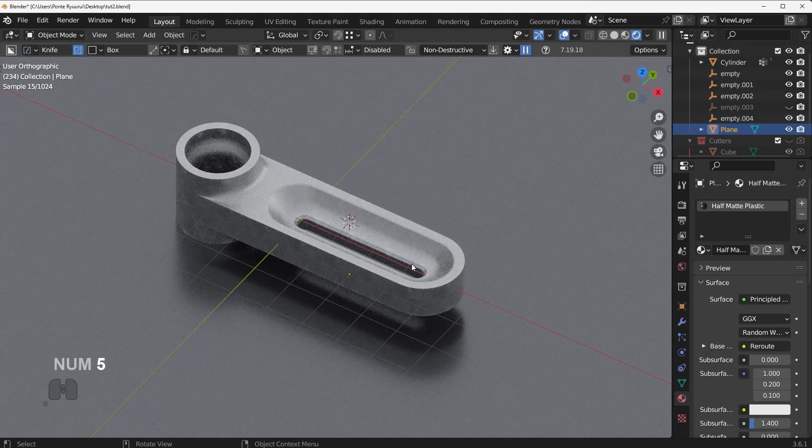And then we can just do a simple looking render, and that's really all you do. You press Shift A, you add in your camera, you can set up the camera angle. If you go up here, by the way, you go to View, Align Active Camera to View, or you can press Control-Alt-0 on the numpad to do that.

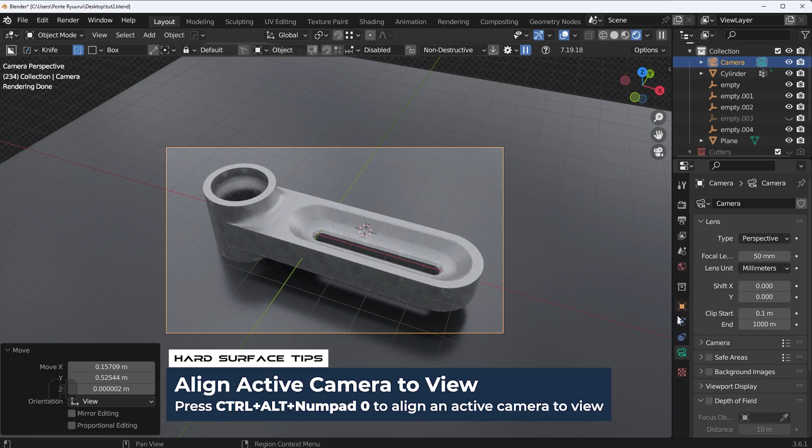You can just play with it, find a good positioning, I could spend hours doing this if I really wanted to. Then you would just press F12 to render it, very basic stuff. I'm going to play with this a little bit off camera because I don't really want a sloppy render for this, but yeah, you get the idea, so that's how you do it.

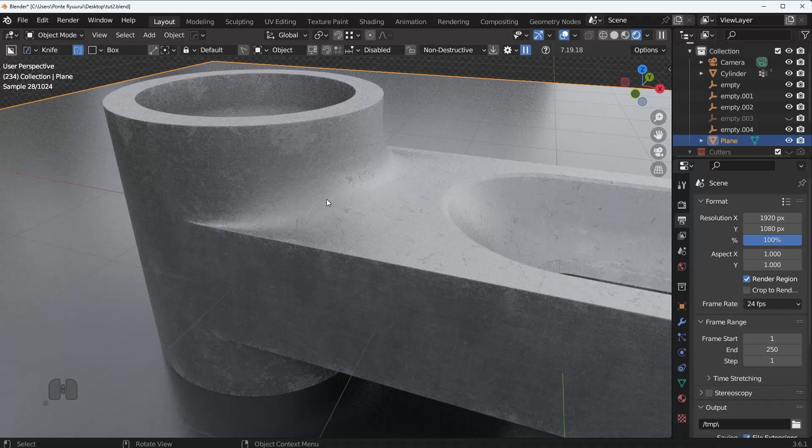That is how you model a pretty interesting piece like this, one that would normally require CAD, get some cool textures, get some good designs and things like that.